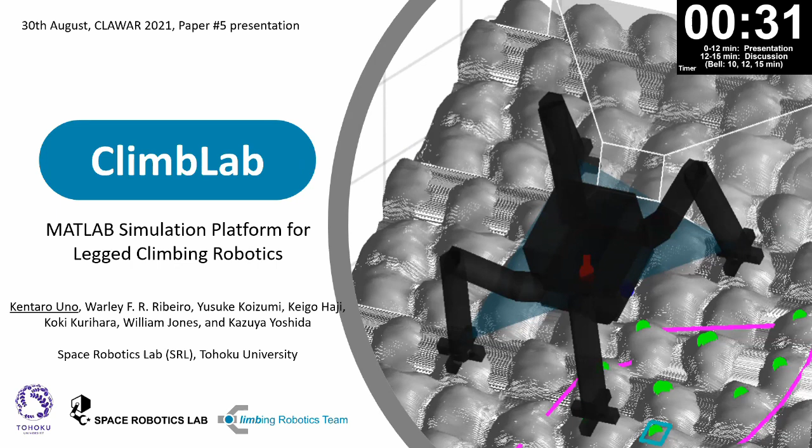Now, legged climbing robots would be the key technology to expand the mobile robots' exploration coverage and the application fields of legged robots. However, it is generally not simple to perform experiments with climbing robots because of the difficulties accessing harsh natural terrain. In addition, field testing campaigns for these climbing robots often require large-scale equipment to ensure the safety of the robot and operators. And these safety tools, such as gimbals and safety ropes, would interfere with the robot behavior.

On the other hand, some experimental validation can be performed in the indoor test field. Iterative testing in the indoor controlled environment is also essential in terms of reproducibility and safety compared to outdoor testing in natural terrain. However, this kind of test bench has a limited workspace, so the type of experiment is constrained. There should be a trade-off between safety and reality for mobile robot experiments, particularly in case the robot is deployed in such an extreme environment.

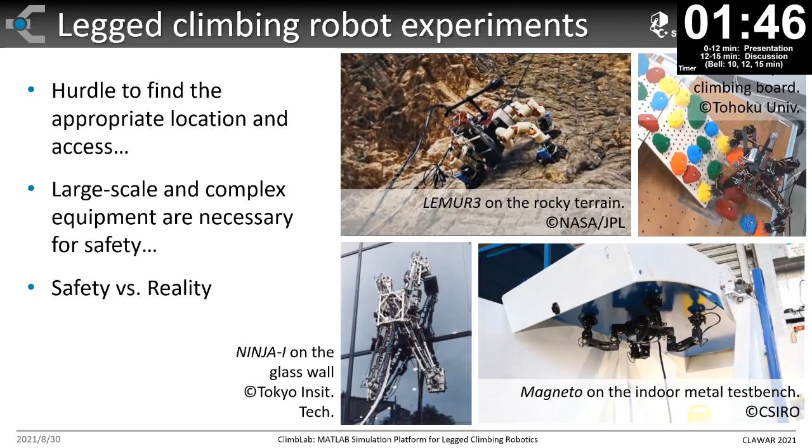In developing such robots that must work with high reliability in a harsh environment, simulation-based study plays an essential role. Particularly in the design phase, preliminary simulation analysis gives us fundamental mechanical requirements to decide link geometries, mass distribution, and actuator selection. Also, in the validation phase, simulation in severe or high-risk situations is quite important to investigate the climbing performance without any physical risks before real-world deployment.

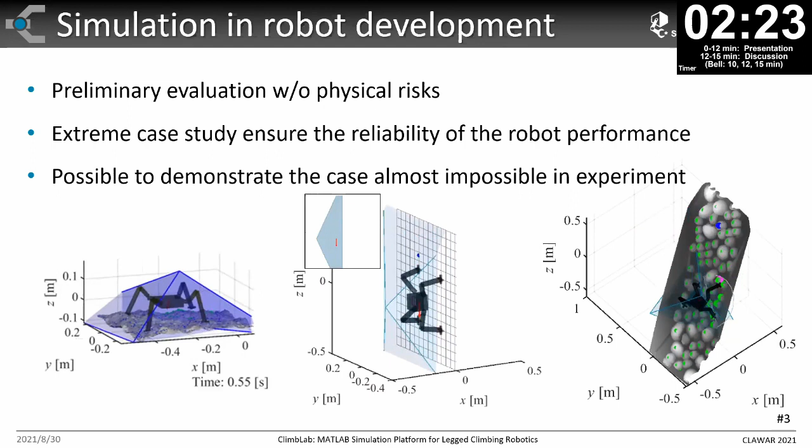Our research group has been building the simulation platform in the project to develop legged climbing robots towards extreme environment exploration, named ClimbLab. ClimbLab is a standalone simulator dedicatedly designed for legged robots walking and climbing. And basically the user does not need any additional toolboxes. ClimbLab has many functions that are uniquely useful for climbing robotics. For example, equilibrium-based tumble stability criterion evaluation, the demonstration of the gripping force and gripping state evaluation.

Also in this simulation development, as a main policy, we have been focused on simplicity and modularization in the code. All the modules illustrated in the right-hand side figures are organized as modules with simple subroutine functions. I believe this code style would be useful for the user, especially to begin the research and development of such mobile robots with complex systems.

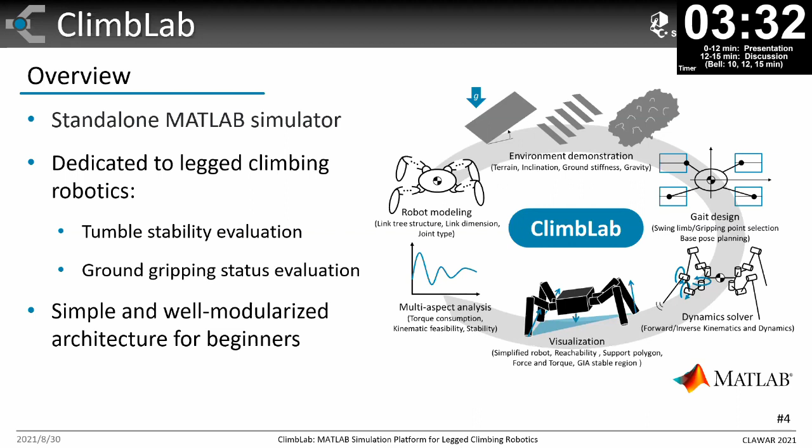Let me go on to ClimbLab's available functions in detail. ClimbLab has all essential modules necessary for climbing robotics. Any robot models are designed as articulated systems. The simulation world is also customizable by changing terrain shape, inclination, ground stiffness, and gravity. Various walking gait strategies can be built by changing the modules of swinging limb selection, foothold selection, and base pose planning, and so on. Of course, the user can implement their own motion planner in the module with ease.

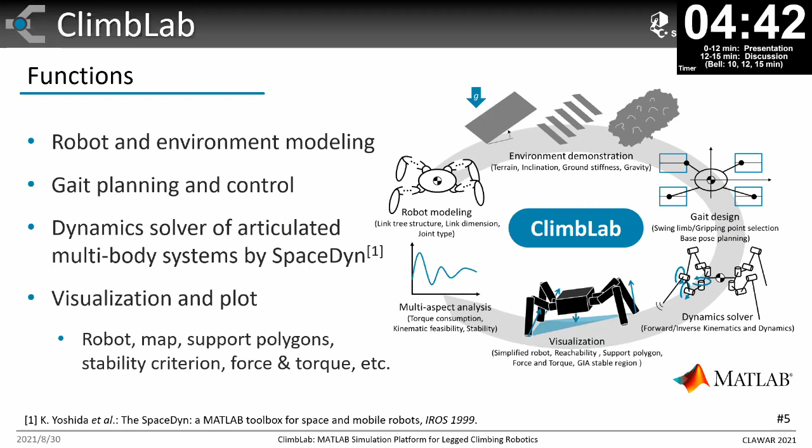ClimbLab simulator employs only one single toolbox named SpaceDyn for rigid body dynamics computation, which was also developed and is maintained by the same authors. The SpaceDyn module is also automatically installed with ClimbLab. ClimbLab's visualization modules enable logging and plotting all the variables and making an animation of the robot behavior so that the user can smoothly perform detailed analysis.

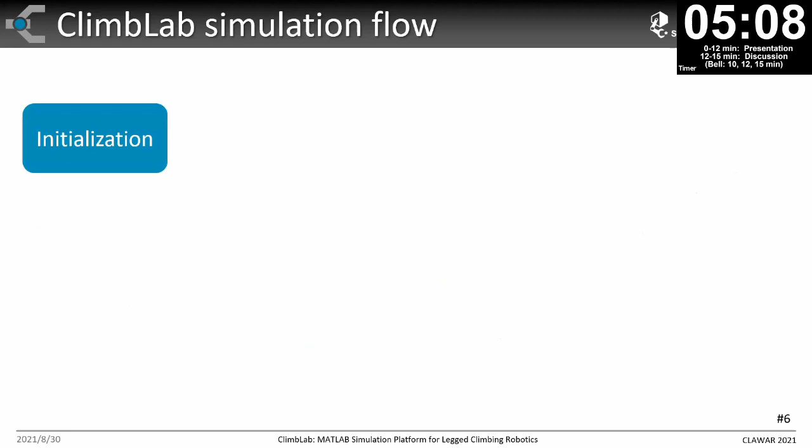In this slide, let me briefly present the simulation flow of ClimbLab. Each of ClimbLab's computational phases is composed of a group of subroutine functions. First of all, various parameters are defined according to some preset files or manual settings by the user in advance. Then, at the beginning of the main simulation loop, information from the surface is obtained, as it would be on an actual robot collecting point cloud data from a camera. This module is useful to simulate the robot's vision sensors.

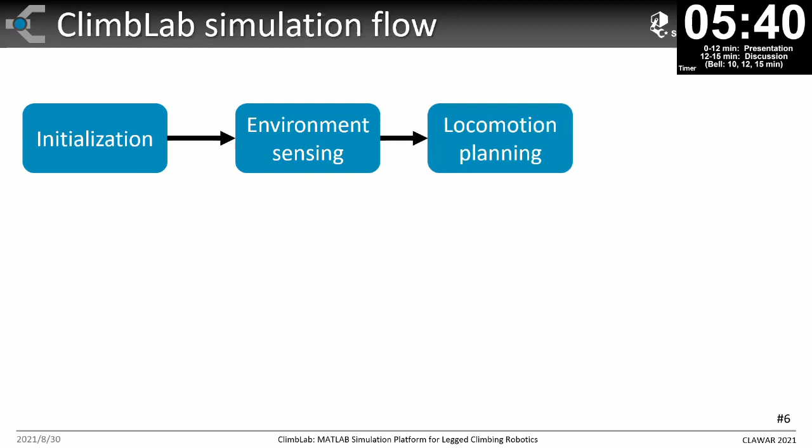In the next locomotion planning modules, the robot walking gait is planned, and by solving inverse kinematics and dynamics, the necessary state variables, such as joint angular positions, are updated at each moment. Subsequently, dynamics and static equilibrium of the robot are computed in order to evaluate the robot stability, considering the robot pose, gravity and acceleration effects, and gripping force. In this module, several stability margins are calculated.

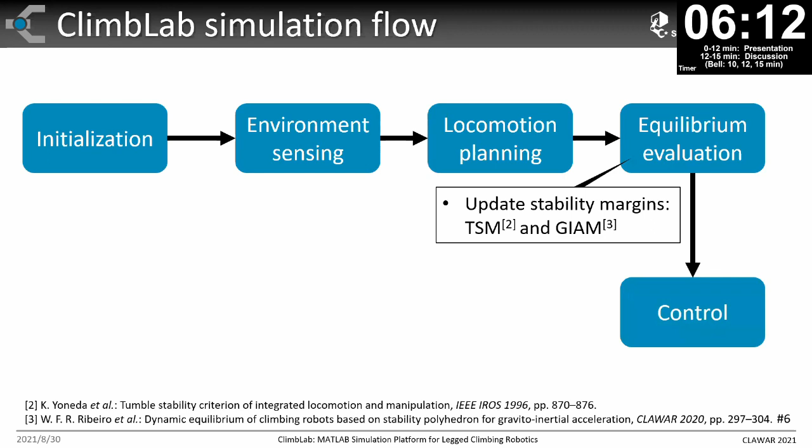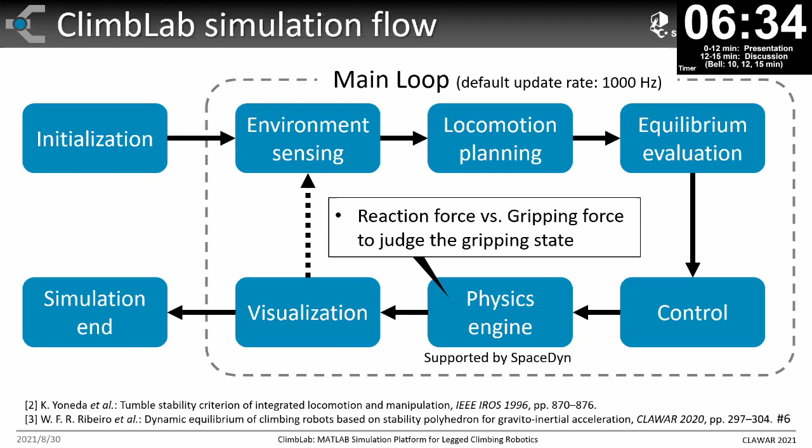Next, the input signals of the actuators of the simulated robot are calculated to achieve the desired joint position. In the following modules, the physics engine calculation is performed. This module includes the gripping state evaluation. Then, based on the physics calculation, the robot pose is updated. This main loop calculation is updated at a rate of 1000 Hz as a default setting until the simulation is finished. From now on, I'd like to show some simulation examples by the ClimbLab simulator.

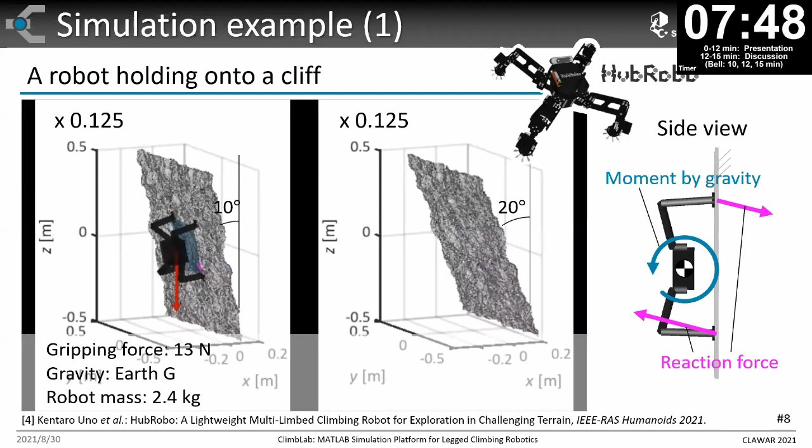Focusing on the robot behavior, the upper grippers detach first, and finally, all the feet lose contact with the ground. This behavior can be explained in the right illustration. For the robot climbing on the wall, the face-up moment is acted by the gravity. As a result of this, the direction of the reaction force acting on the feet is opposite between the upper feet and lower feet. If the reaction force acting on the upper feet becomes larger than the gripper's endurable force, the upper feet lose the ground contact. From this simulation animation, we can see that ClimbLab can demonstrate this physics reasonably.

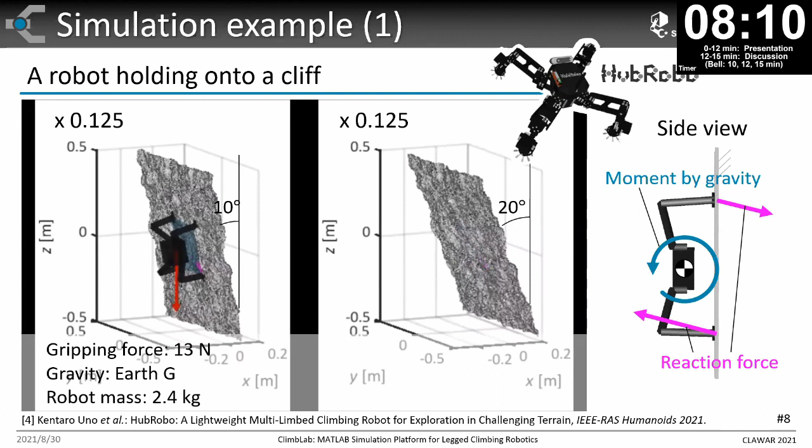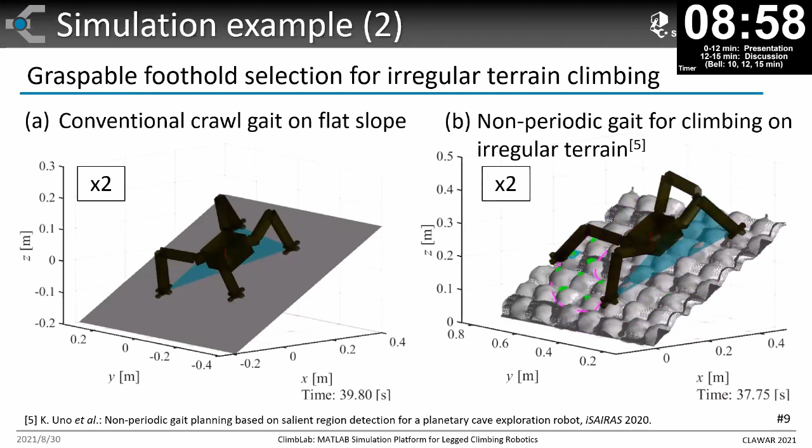In this simulation, the graspable points in the swinging leg's workspace are detected at the summit of the convexities, shown as the green dots. And the gait planner used in this simulation chooses the optimal leg and its footholds step by step. This type of non-periodic, non-gaited walking sequence is necessary, particularly for rough terrain climbing locomotion.

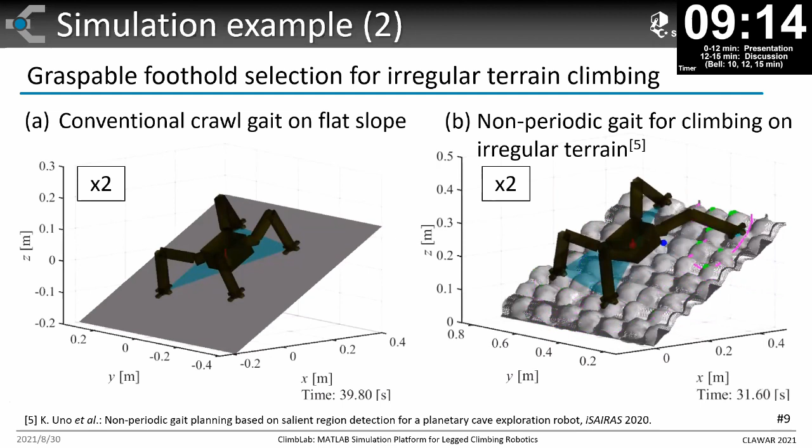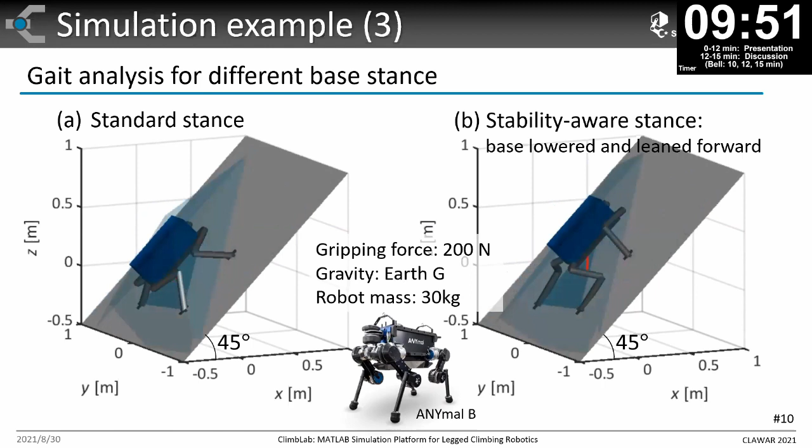By analyzing the time plot of the tumble stability margin and the joint torque consumptions, the stability-aware stance achieves higher stability and less energy consumption compared to the standard stance. As shown in this simulation analysis, we can see ClimbLab's capability to evaluate the climbing robot's performance like this.

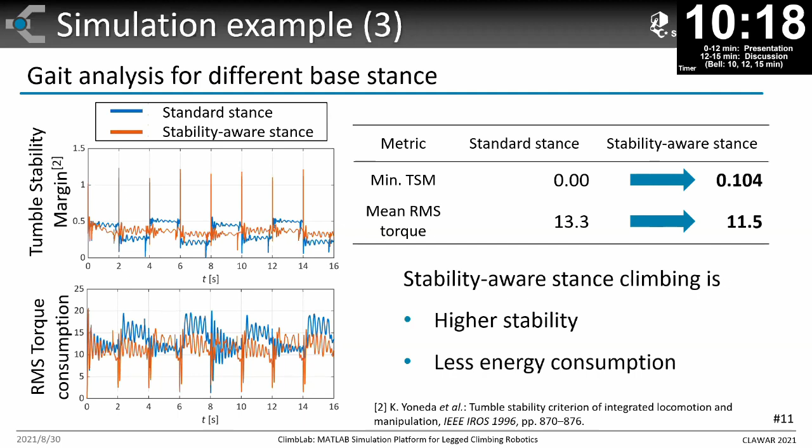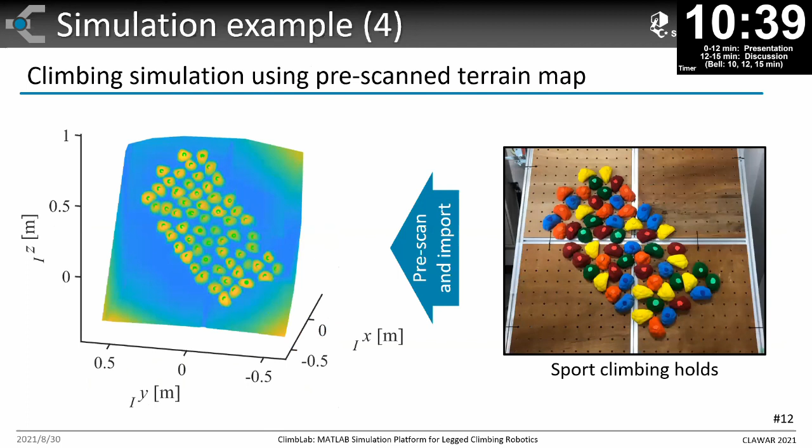As a last example, we imported the pre-scanned terrain map into the ClimbLab framework and ran the robotic climbing simulation using this map. ClimbLab is capable of importing any 3D point cloud data format to handle the terrain information. These are the simulation results, assuming the robot climbing on the pre-scanned terrain map. As you can see, the robot successfully climbs the more realistic steep irregular terrain. In this simulation, the robot is finding the graspable convexities, selecting the optimal footholds, and adapting the base pose to sustain the stability. Even where the inclination of the terrain is completely vertical, the simulation succeeded.

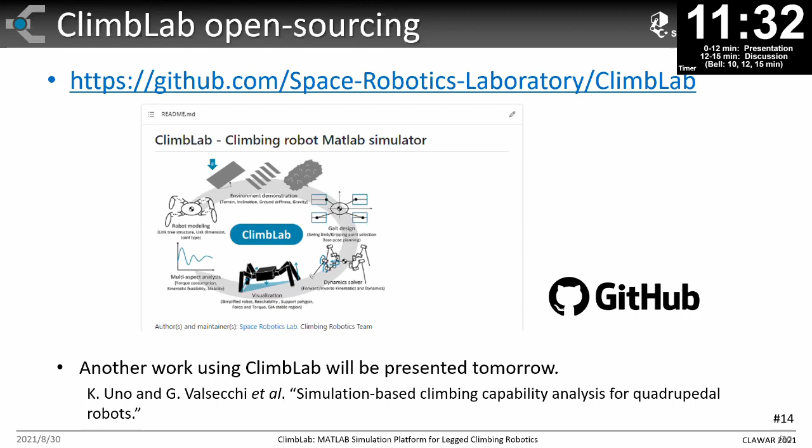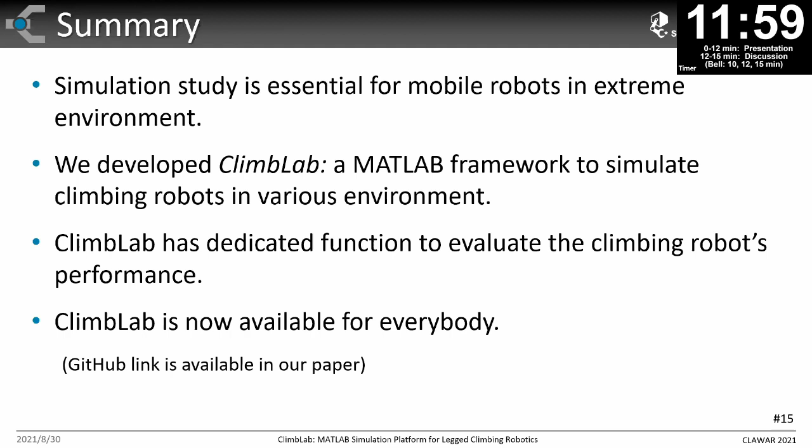Then I'd like to conclude this talk. Simulation study is essential for mobile robots, particularly those working in extreme environments. And we developed a MATLAB-based framework to simulate and analyze legged climbing robot dynamics named ClimbLab. I introduced many simulation examples in this talk, and if you are interested in using this simulator, please go to our GitHub page. It is already open sourced.